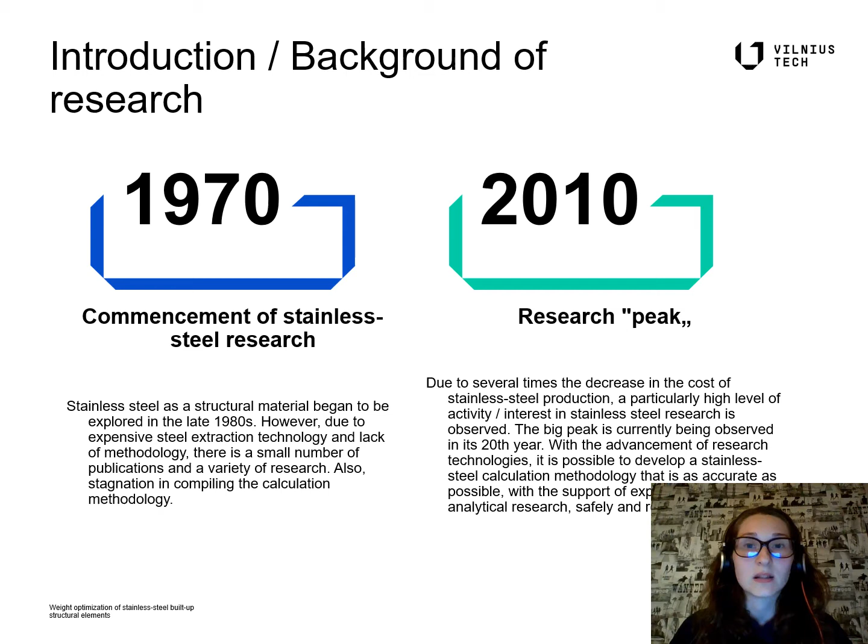After 30 to 40 years, due to several times the decrease in the cost of stainless steel production, a particularly high level of activity and interest in stainless steel research is observed. The big peak is currently being observed in its 20th year. With the advancement of research technologies, it is possible to develop a stainless steel calculation methodology that is as accurate as possible with the support of experiments and analytical research safely and reliably.

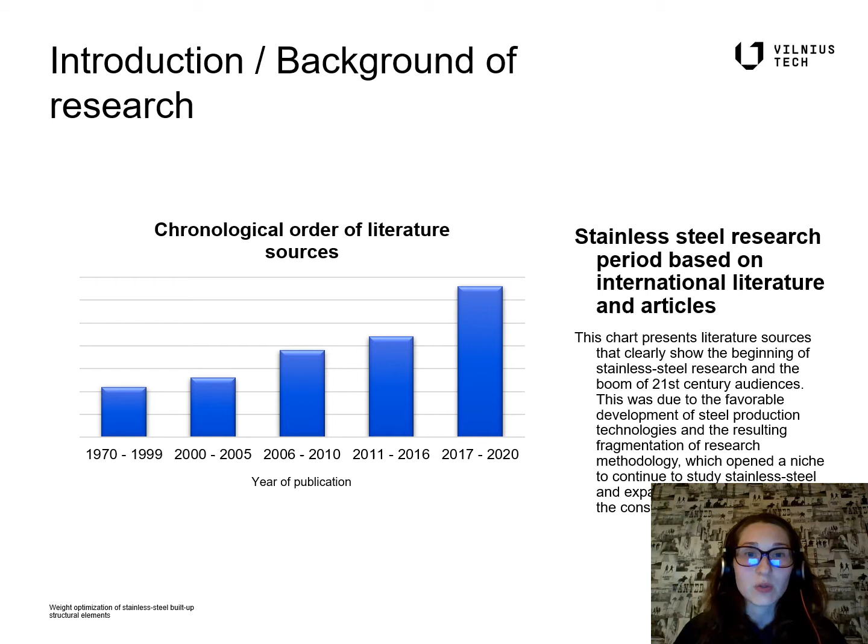Moving on, this chart represents literature sources that clearly show the beginning of stainless steel research and the boom of 21st century audiences. This was due to the favorable development of steel production technologies and the resulting fragmentation of research methodology, which opened a niche to continue to study stainless steel and expand the use of the steel in the construction market.

Stainless steel as building material with the most useful properties has long been used in extreme cases. Stainless steel as a material consists of many different metal alloys. It is very convenient to choose the one that is best suited in the prevailing environment and during construction and installation. Austenitic and duplex are most widely used in the structural steel selection and are currently widely used, especially in design of structures such as built-up columns, tetrahedral trusses, and frames.

For more specific, austenitic stainless steel is usually used in structural design of rural, urban, and light industrial sites, marine sites. Duplex steel is used in structural design of structures in marine and other aggressive environments, also used in many onshore exposed conditions. And finally, ferritic stainless steel is usually used in chloride-containing environments.

Moreover, optimal and efficient design is extremely relevant and often desirable when designing commercial and industrial constructions. The benefits of structural optimization are best reflected in the construction of large spans and/or extremely high structures. In both cases, the arrangement of structural elements is as economical as possible when the critical stresses are applied. Because of their layout and profiles, the stability, strength, and weight of an entire structure depends on it.

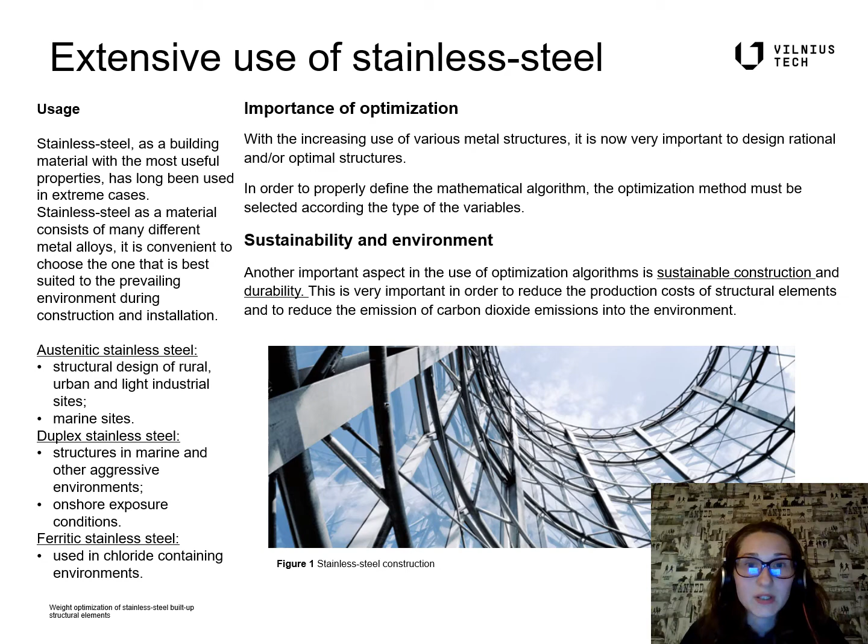Another important aspect in the use of optimization algorithms is sustainable construction and durability. This is very important in order to reduce the production costs of structural elements and reduce the emission of carbon dioxide in the environment. This makes the designs environmentally friendly. As is known, the structure of high-rise buildings has the greatest impact on the environment, so the use of optimization algorithms is particularly relevant, especially for materials such as stainless steel.

The aim of this paper is to analyze a realistic model of structural elements of stainless steel, which plays an important role in the analysis and design of steel-framed structures. Structural element modeling and optimization using stainless steel in case of built-up column can contribute to existing research on stainless steel. The object under consideration is a stainless steel built-up column, which is classified as a typical structural element.

The purpose of this optimization problem is to perform the minimization of the weight of a selected built-up column when the height of a column and the load acting on it are known. The built-up column is considered with two different types of cross-sectional chords. At first with circular cross-sectional chord and then with elliptical cross-sectional chord.

The structure to be analyzed has to satisfy the strength and the stability constraint, as well as the in-plane and out-of-plane restrictions. These conditions are accepted in the optimization problem as constraints in order to find the variables. Restrictions also include the determination of a class of cross-sections used at the design condition defining the relationship between the column chord and the diagonals. Here is a standard design optimization model with equality and inequality constraints, where variables are described as continuous, and a general model for optimum design.

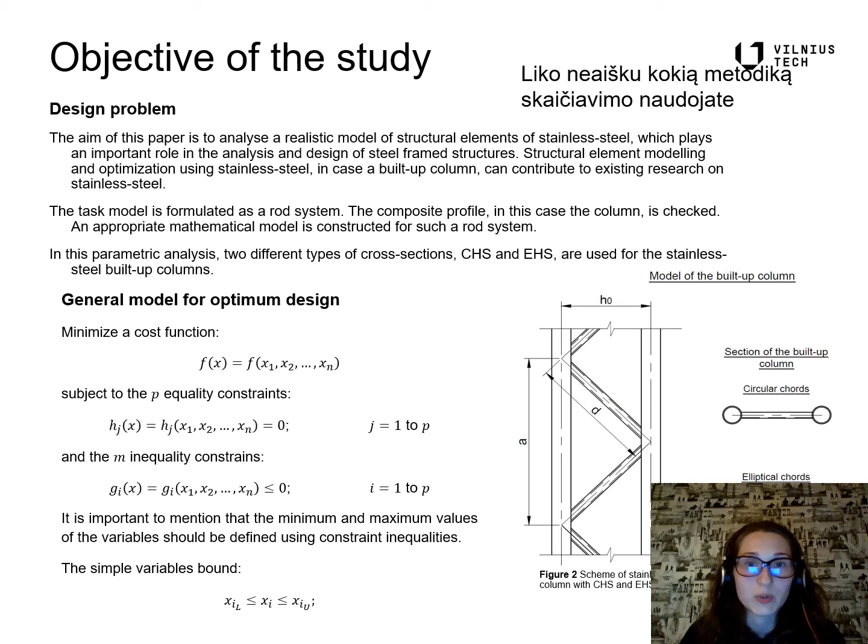The solution of the optimum design problem is given from an equation that requires the selection of appropriate stainless steel sections so that the weight of a built-up column becomes minimum while the constraints are satisfied. Because of this, the design problem becomes a continuous programming problem. Such a problem can only be solved by mathematical programming. It is very important to mention that this is a non-convex optimization task, and one of the ways to solve it is a genetic algorithm. According to this, genetic algorithm is the best choice to provide an effective solution to the continuous optimum design problem.

The objective is to find a minimum cost function of built-up column weight. The defined problem shall be worded in such a way that by means of a genetic algorithm, optimal variables are found that satisfy the conditions and restrictions.

In this parametric analysis, two different types of cross-section, circular and elliptical, are used for the stainless steel build-up columns. First of all, when the circular cross-sections are used, the axial load and bending moment are gradually applied to the selected build-up column. Then the same load and analysis is applied with elliptical cross-section.

For case A, the parameters that are selected during the analysis are distance between column chords, acting axial load, and maximum bending moment at the middle of a build-up column. Chosen variables: outer radius of a cross-section of a built-up column, wall thickness of a cross-section of a built-up column chord, outer radius of a diagonal cross-section of a built-up column, and the wall thickness of a cross-section of a diagonal.

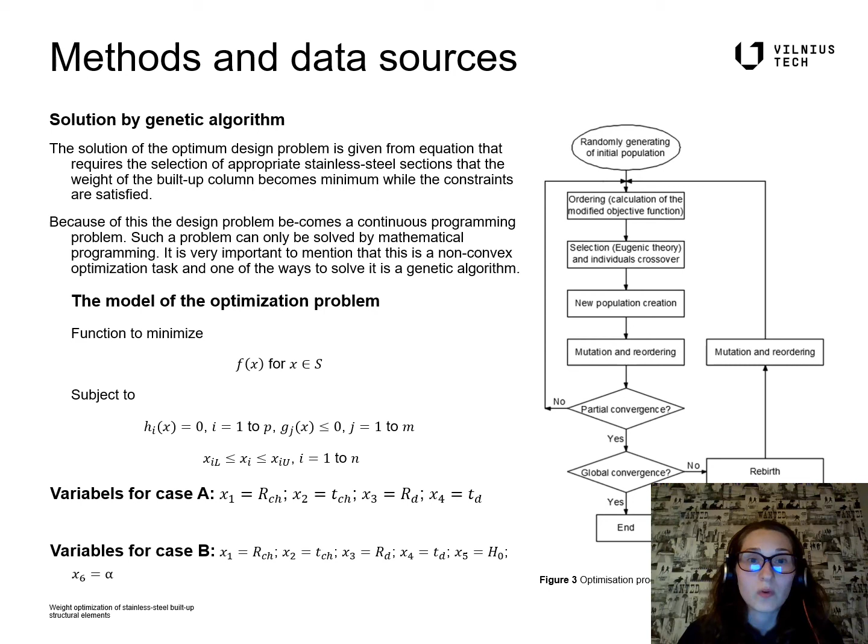At the start of a parametric analysis, the build-up column is loaded with a concentrated axial load and the bending moment is set to 0. The next step in parametric analysis is to include in the analysis a fixed maximum bending moment in the middle of a column. The principle of analysis is analogous to the previous one. The axial load is gradually increasing and the space between column chords is changing. The results show that the optimum weight of a build-up column depends on the bending moment and the distance between the column chords. The final step of parametric analysis is slightly different.

According to influences of bending moment in search of an optimum build-up column weight, an analysis is performed where the concentrated axial force is constant, but there is a gradual increase in bending moment in the middle of a column. The results of analysis showed that as the spacing increases, the optimum column weight decreases faster.

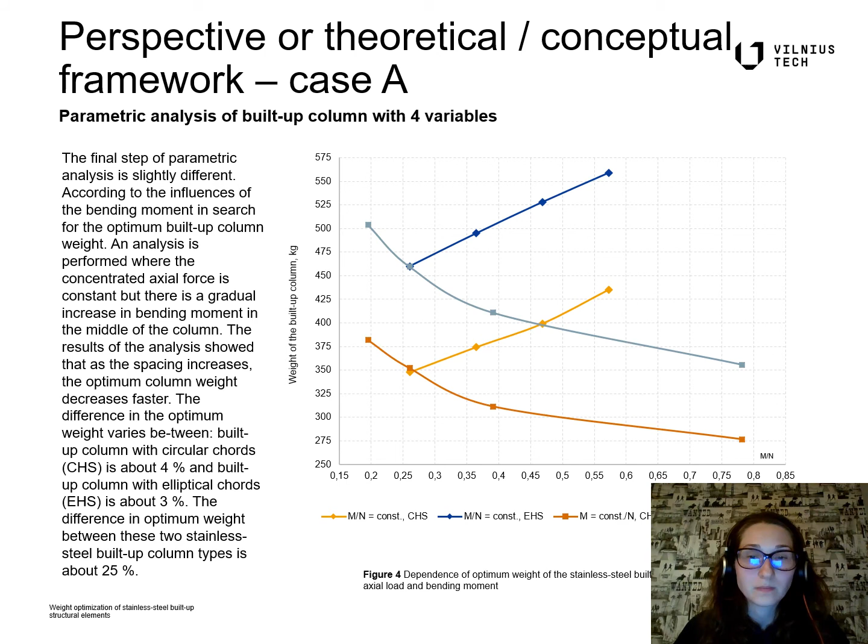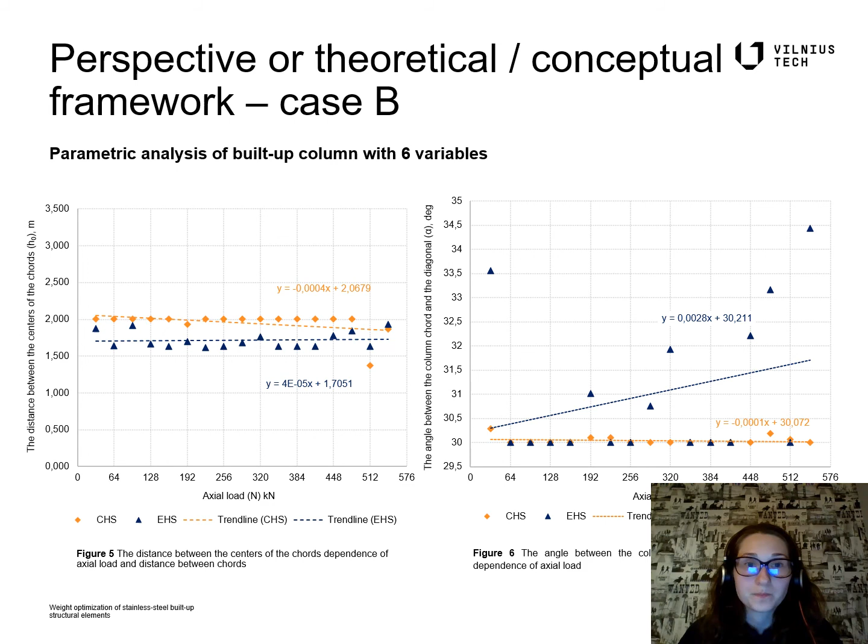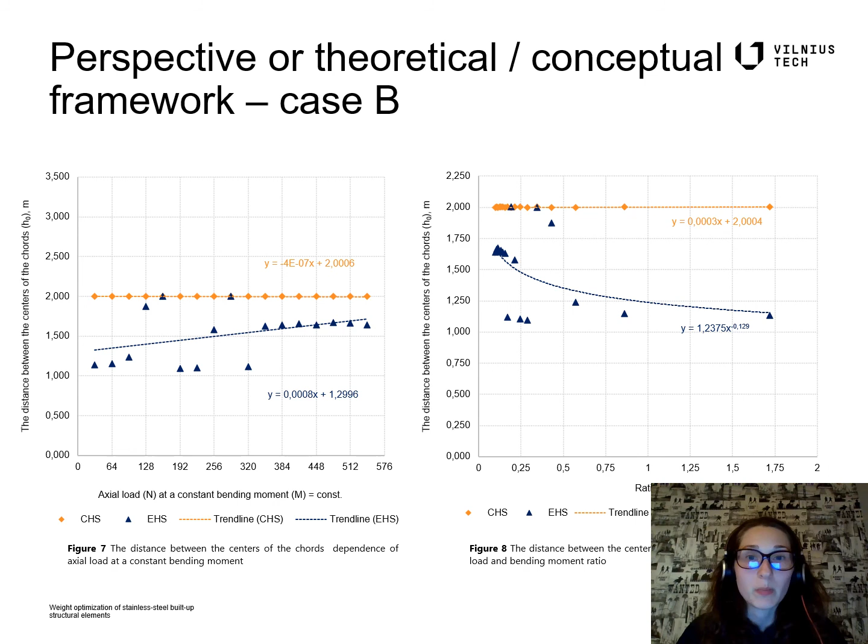To sum up, the computational results showed that the chosen optimization model and genetic algorithm allow to efficiently obtain the column of minimum weight where the variables are column chord and diagonal cross-sections. Taking into account the results obtained from a parametric analysis, it can be stated that the discrete problem should be solved further in order to adapt the assortment of profile sections. The obtained result confirmed that these types of structural elements of the steel in question are needed to develop a more efficient design of stainless steel structures in the design method, thus contributing to its wider use in construction.

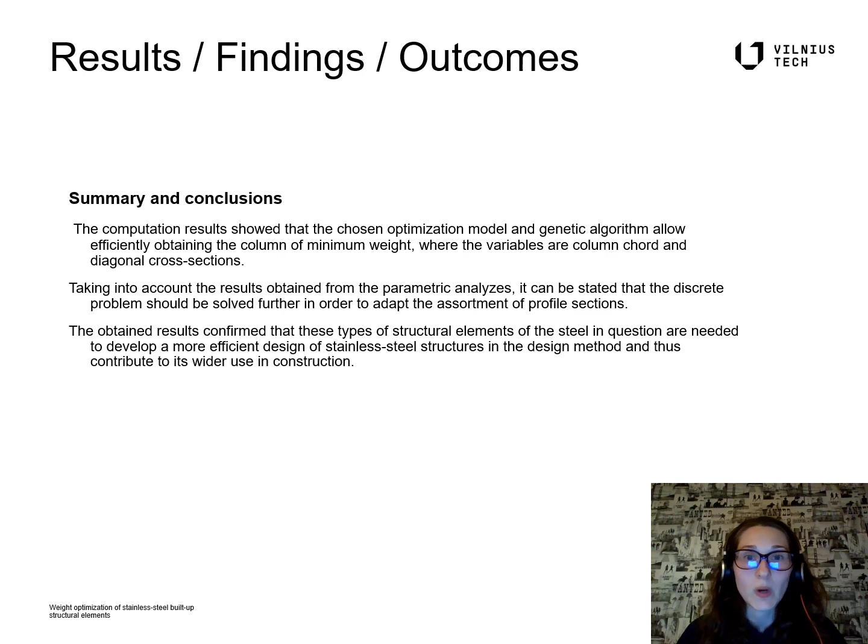During the literature review and searching, the most surprising was the wide use of stainless steel. It is widely known that such steel is used in structural constructions for a very long time. However, the most surprising was the use of such steel in cosmic spaceships. This once again proves the advantages of stainless steel compared to normal carbon steel or others.

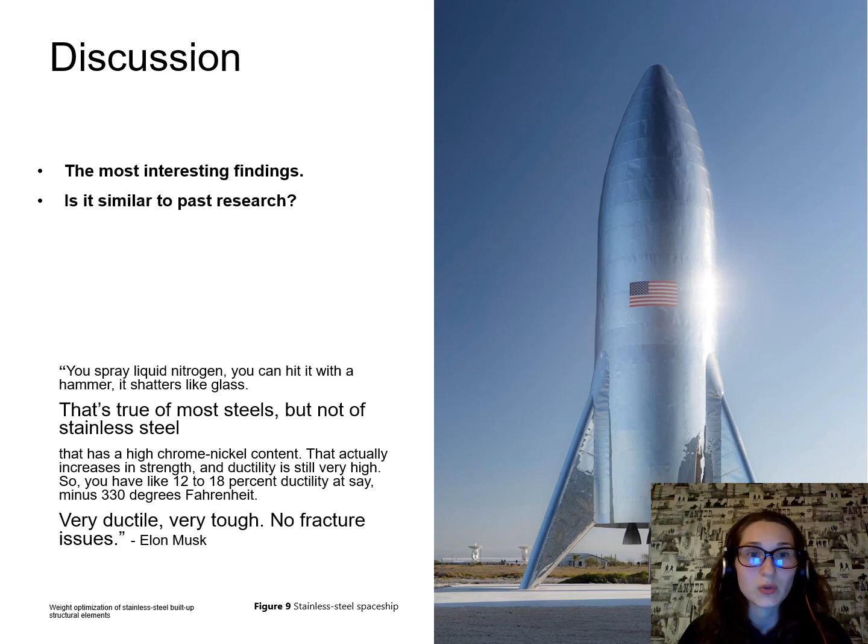Here I have to mention the basic and most important sources of literature on which I have prepared this research.